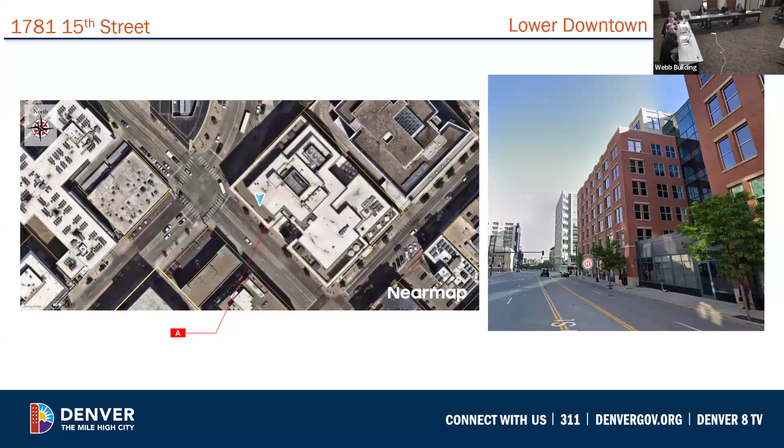The property is located within the 1515 Wynkoop Building and falls under the approved comprehensive sign plan adopted on November 7th, 2024. The proposed sign would be installed 9 feet 6¼ inches above grade, mounted on a brick wall between two first floor street-facing windows. This placement is allowed under the current sign plan. Next slide.

The proposed projecting sign is 11.25 square feet and includes design elements on both pedestrian and street facing sides. On the pedestrian facing side, a circular icon at the top features a tooth with a white acrylic face, internally illuminated with LEDs. Below it, a rectangular section contains push-through acrylic lettering spelling Dental Elements. On the street-facing side, the lower portion includes an illuminated push-through logo in the shape of a tooth surrounded by an illuminated border.

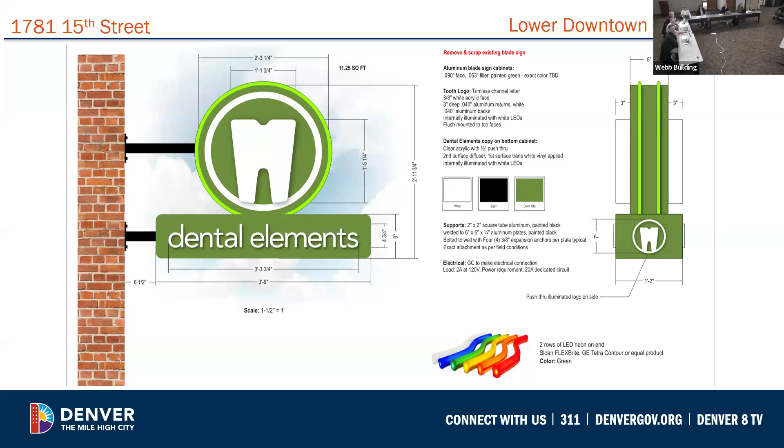Here's a rendering showing what the proposed illumination would look like at night. The sign is constructed with an aluminum backer base and supported by black painted aluminum tubing. The mounting system includes aluminum plates bolted to the wall with expansion anchors.

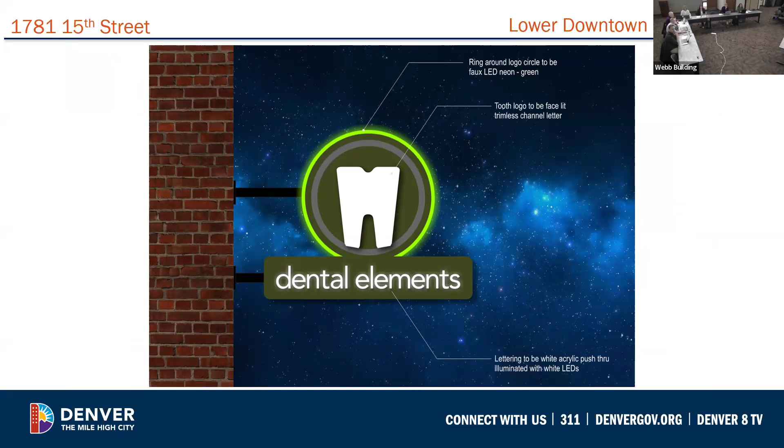The comprehensive sign plan, which governs signage for this property, does not permit the use of acrylic materials for internal illumination. This means the proposed internally lit acrylic elements do not comply with the approved sign plan.

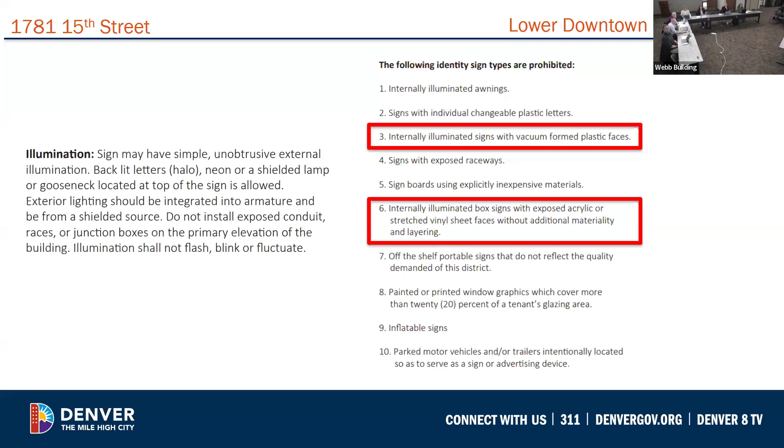The Lower Downtown Historic District guidelines prioritize externally lit signage to maintain the district's historic character. Internal illumination as proposed in this signage does not align with these guidelines.

Staff communicated these concerns to the applicant and suggested alternative lighting options such as halo or edge lighting, neon, or gooseneck external lighting. However, the applicant stated that these alternatives would not meet their needs and maintained that internal illumination is essential for their signage.

Based on the conflicts with the comprehensive sign plan and the Lower Downtown design guidelines, staff recommends denial of the proposed sign.

Thank you, Andrew. Are there any questions for staff? Fred? I have a procedural question just to make sure I'm clear.

In terms of our purview as this body, do our review criteria include the comprehensive sign plan and the guidelines, or does the comprehensive sign plan simply guide the zoning reviewer? No, we are governed by both since this body formally adopted the comprehensive sign plan last November.

Great, and secondly, just a hypothetical question. Were this body to approve the application, would it still then go to a zoning review against the comprehensive sign plan? Yeah, in which case they would deny it. Thank you. We don't know. Right, we don't know what action zoning would take, but they would also struggle with compliance. I mean, it's not met the plan. Thank you.

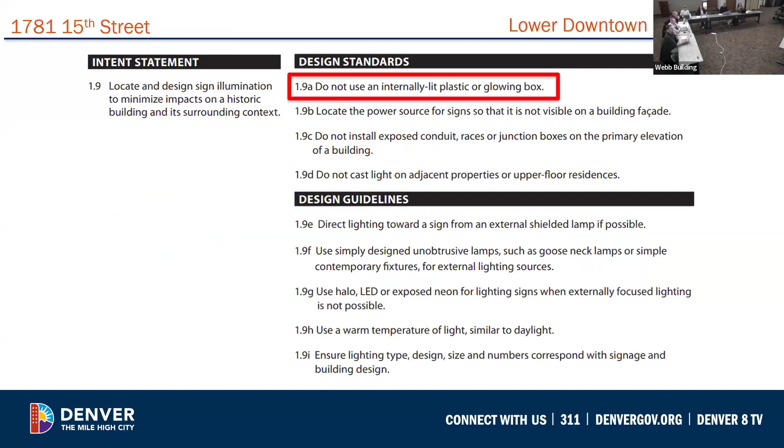Yeah, this is in relation to the materials, so guideline 1.7B: do not use signs with plastic faces, and acrylic can only be used for window graphics.

And to that question, I would highlight that the applicant in their application, in the letter that is part of their application, seems to indicate that this is, quote, pushed through illuminated acrylic letters. So I don't think that's in question. No, I'm not questioning that at all. I just didn't know if there was a distinction between the letters themselves and a box. Just curiosity.

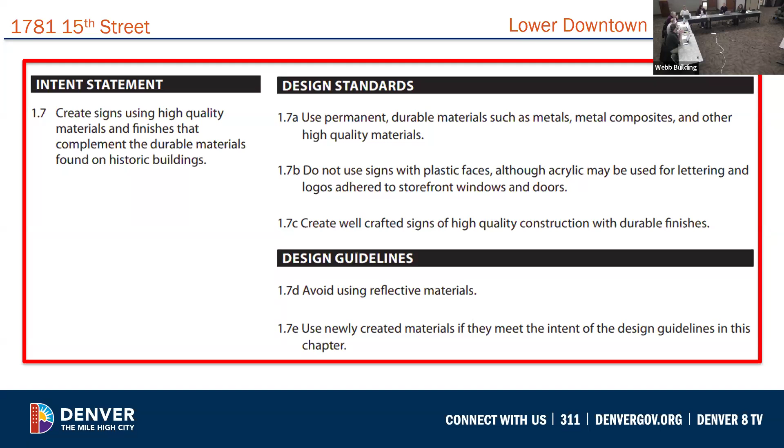Yeah, there's a difference in the depth and what you get out of that, but it goes against the landmark guidelines and the comprehensive sign plan. I think, while I understand the applicant's desire for a sign that's visible and well lit, I think there are ways to do that and still be in compliance with both the landmark guidelines and the CSP, and this is not doing that.

I would agree. Agreed. I think it's unfortunate that the letter sort of says, yeah, these are the rules, but I think they're wrong. And that's not really a successful path to approval, I think. So I would encourage the applicant, if they review this, to discuss with staff what would meet the guidelines.

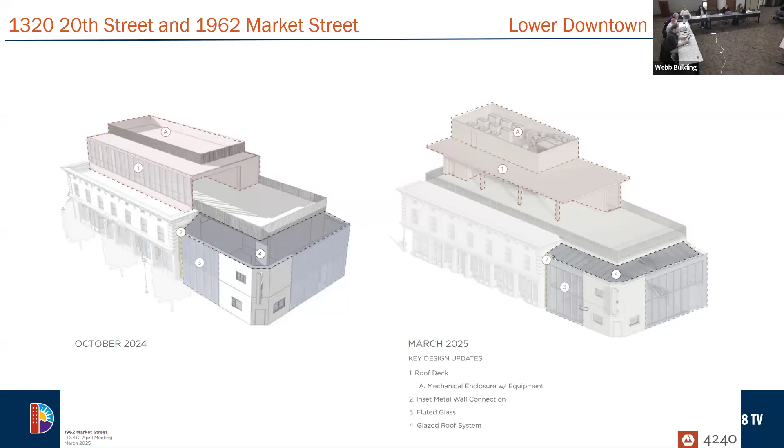Staff is supportive of the proposed rooftop changes to the design and the mechanical screening. The remaining portions of 1962 Market Street and the glass wall additions are consistent with design and materials found in the district and are to be connected to 20th Street with an inset metal wall connection at that 20th Street elevation. You can see that just at the end of 20th Street between that and the glass wall that will be on 1962 Market Street.

The standing seam metal addition of this connection is approximately 5 feet in width before changing over to that glass wall, which will now be capped by a metal parapet, previously not in the other design. These design changes are unobtrusive and do not overwhelm the contributing structure. The changes also help show the historic separation between 20th Street and 1962 Market Street and show a transition to the remaining portion of the old El Chapultepec at the corner.

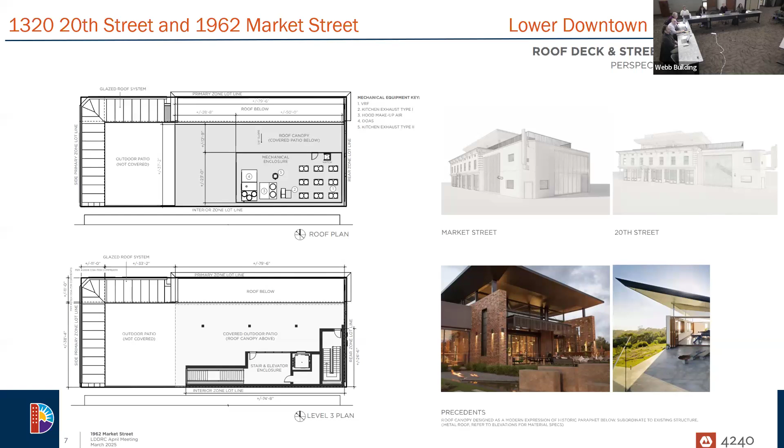So the applicants are only proposing these outlined changes as detailed and shown here with the application revisions. All other aspects of the previously approved demolition and design will remain the same. The design still meets all the previous design guidelines and lessens impacts to the contributing structure. Therefore, staff is recommending approval.

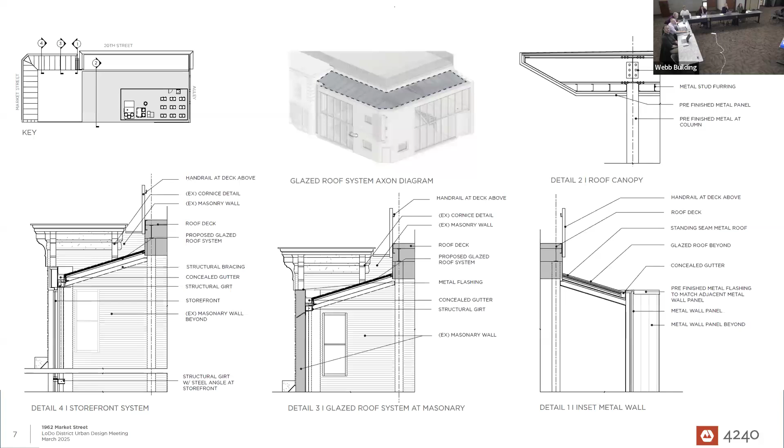But what this will do is provide a light and an energy that is kind of emanating from within. If we can proceed to the next slide — oh sorry, back to slide 4 please. Back a little, back a little to slide 4. Thank you, or slide 4.

What you can see here too is the glass frit — the previous ceramic frit glazing that we had. We felt like fluted glass was more timeless, more elegant, and really kind of a nod to the late 1800s when these buildings were built. It also provides just enough obscured view on those upper levels in different shades of light, so you see this energy from within, but you can't necessarily see everything happening on these upper levels. So it really creates this fun nod of energy and a memory of the space that used to be there. I'll just say one last thing.

I think before we set down this path to come back before you, which I was reticent to do, we went into this with the mindset that we had to make sure this was going to be something you all felt was better than before. So we hope you take that away. Great effort was placed into trying to do the things we've talked about in previous proposals, in terms of sitting subordinate and hiding different features we're adding. We really want you to look at this and say this is an improvement on what we had before. So we hope you do.

Jen, Lauren, anything else to add?

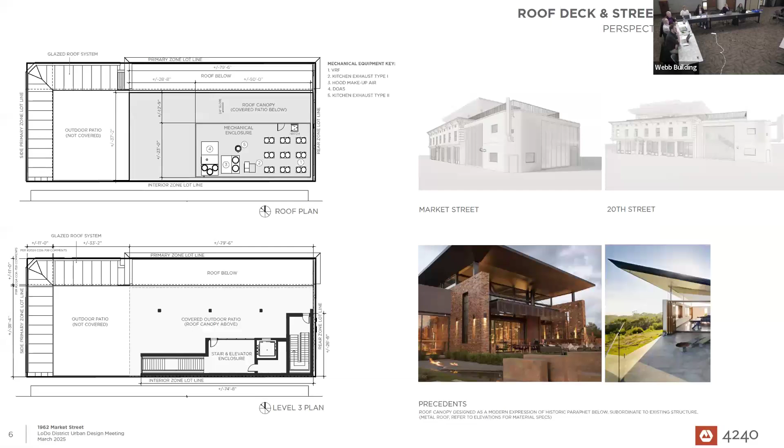It's based on the tallest piece of equipment. We have a DOAS that's fully electric that sits on a pretty tall pedestal, so we're making every effort to lower that as much as we can. Right now we're looking at flipping some of that equipment on the roof to further minimize that height. But because it's 100% electric, we're limited on the equipment we're able to specify that will accommodate our building, and it is quite tall—much taller than a typical gas-powered RTU.

We did investigate the possibility of recessing the mechanical well, but from a structural perspective that was advised against. So what we've done is positioned these in the most advantageous way to minimize the mechanical well and tuck it into the best position. Some of these perspectives are meant to demonstrate that from those viewpoints you can't really see it. To Jen's earlier point, intentionally painting that well to match the building behind it will further mask it. So we've taken great lengths to try to minimize or mask this as best we can.

Is your intention with the glass that the fluted piece is the interior pane of the IGU? It is, yeah.

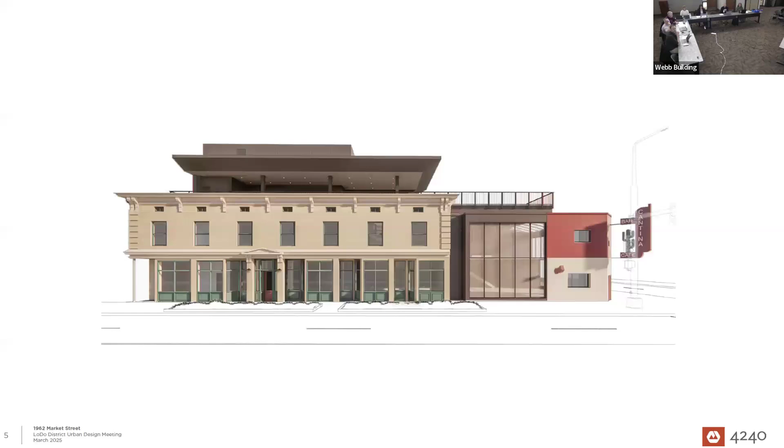You don't have an elevation that shows the adjacent structure height by chance, do you? No, we don't, but it is taller than the building. If you go back to slide 4, there's a rendering from that corner—the previous slide, I'm sorry.

You can kind of see it's Whiskey Road just to the right of our building here, it's grayed out. Am I allowed to stand? You can see on the screen this is the top of that roof, and it carries straight back to the alley—it's quite tall. I think staff put the previous approved package, and it is shown much more in that package, for reference.

Any other questions for the applicant? Going once, twice? Okay, thank you very much.

Any members of the public, virtual or in person, to speak on this project? Not seeing any here. Taylor's giving me the head no that there's nobody virtually, so let's open it up for commission deliberation. What do you think?

I think it's a good improvement on the previous. I do agree with that. The one concern I have is the height of the mechanical enclosure.

In looking through it, it looked like the highest mechanical equipment coming through the ceiling was 7'2".

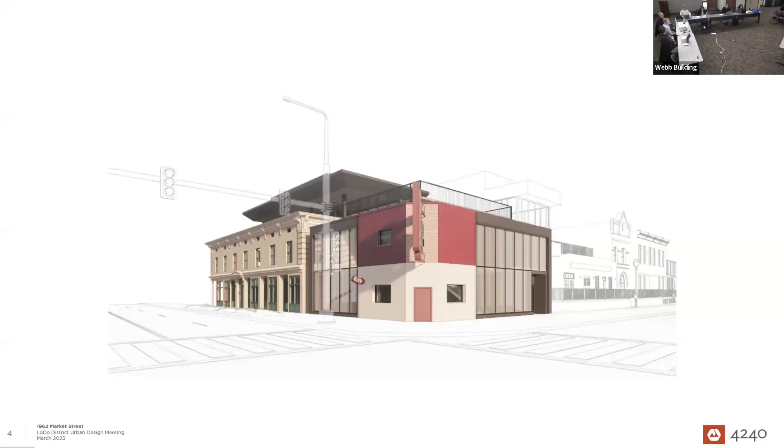And the thing that I really appreciate about going all electric is that the equipment is larger, so it's something we're going to see again as we go all electric. There's a possibility the exact location may need to change as they fit more equipment in there, but the 8'6" does give them plenty of room to make it functional. So I'm not opposed to it, I guess is where I'm going. I appreciate your comments, Fred, but I think it's a necessary evil.

I would agree with that. I don't think there's any issue if we approve it at 8'6" and then they determine it can be 8 feet or 7'6". Lower is always better, I don't think anybody's going to object to that or staff would object to that. So I really think the question is if we're comfortable at the height that it's at.

I agree with Craig's comments. I think it feels heavy in some of the views, but I think that's just because it's a flat elevation, and in reality you're never going to see it that way. Even as you look at it from all the way across 20th Street, it's not going to feel as heavy as it does in a flat elevation. Overall, I think these are really nice refinements.

I think I can speak for the commission that we were all a little nervous about the fritted brick on the glass. The fluted approach definitely feels like it's going to be a lot easier to control for quality and longevity, and not have something that looks a little kitschy and falsely historic, which I don't think anybody on this commission wants to see. So I think they're great refinements.

I think even that upper story structure has been successful in making it feel less massive. Not having that glass on the front, just making it a fully open canopy, helps reduce the mass of that third story roof deck. So I'm in support of the changes.

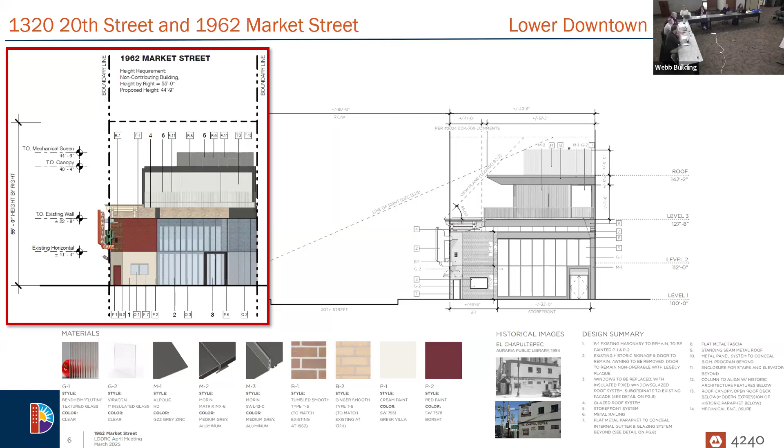I also appreciate the distinction between the historic building that's under our purview and El Chapultepec next door. I think having the hyphenated connector is a much more successful move. And I appreciate the fluted glass, which makes it feel more like a modern addition than, as you were saying, a kitschy brick, which I wasn't really happy with. I think the fluted glass is much more successful. So I'm in support of this application.

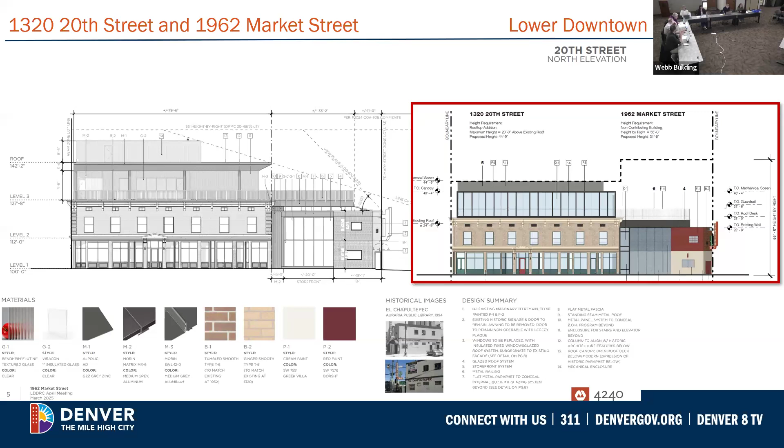Any other thoughts? And if not, would someone care to make a motion? Greg: I move to approve application number 2024 COA 709 asterisk for the revisions to the rooftop deck and side addition at 1320 20th Street and 1962 Market Street, as per design policy standards and guidelines.

Design policy standards and guidelines 1.1.1, 1.1.5, 1.3.1, 1.3.2, 1.4.1, 1.4.2, 1.4.3, 8.1.1, 8.1.2, 8.1.3, based on presented testimony, submitted documentation, and information provided in the staff report.